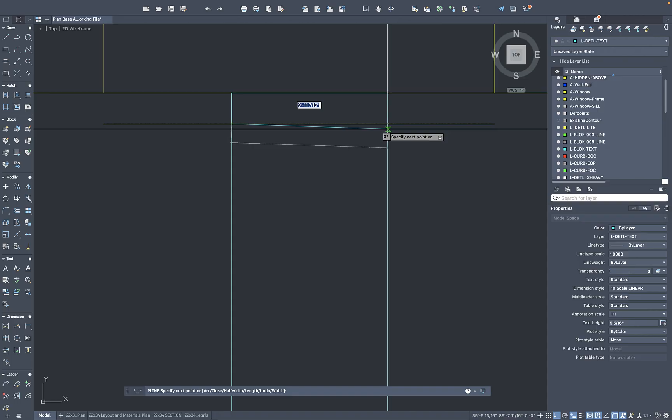So we're going to offset 2 feet off and create a polyline right here that is going to essentially be a large block of concrete, a turned down footing that's going to allow us to connect our boards, our boardwalk, directly into this ledger right here.

So I'll shorten up these 2 outside lines. To get started, we're going to offset these 2 lines 2 inches in, so just offsetting 2. That's going to be the width of our boards. They're going to be a 2 by something, we'll size those later. I'm also going to offset 2 inches this direction.

I want to offset this line because I made it a polyline, so it's going to offset on all sides. I'll come in quickly, trim that line, trim this, and delete the remaining piece here. For this ledger, we're going to trim out this as well, and we'll have our ledger board essentially sitting all the way across and connecting into this turned down footing here.

We need to start building some layers into this drawing. So for this, I'm going to create a few different layers in here. We'll first start with a new layer by clicking on our new layer icon here and just renaming this ledger.

Just for the sake of keeping things straight and making sure that I'm putting them on the right layer, I'm going to go down to my ledger. I'm going to change this to yellow, which means I click here, creating everything on our detail text layer, but I'm going to move this to the ledger layer right here. It should turn yellow. These right here are going to be our joists.

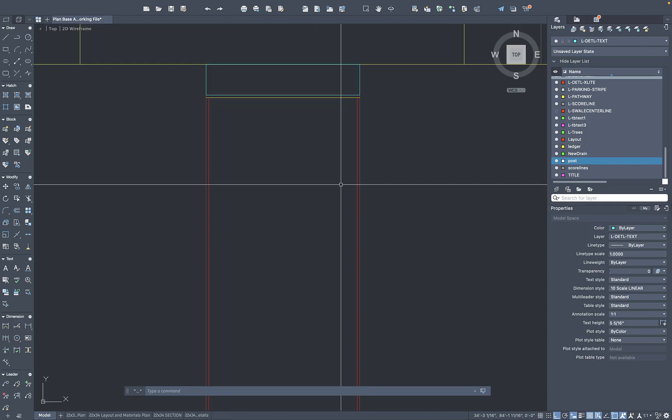Let's actually start creating that post. So we're going to start creating a few objects, then start aligning everything and putting it in here. I'm going to just kind of off to the side create this post. For this, I'm going to create a polyline, just click and go 4 inches over. That's going to be the size of my post, a 4 by 4 post. We'll just type 4 inches in each direction and then C space to close this off.

Let's go ahead and move this to our post layer. It should turn white. This post is actually going to sit on a concrete footing, and we're looking up at the top of this, so there's a few additional things that we're going to put in. If you look over here, we've got the X in our example, and that's going to mean that we're looking at the end grain of that post. So we're going to put that same X in here, we'll just type L space for a line and create a line there and a line here.

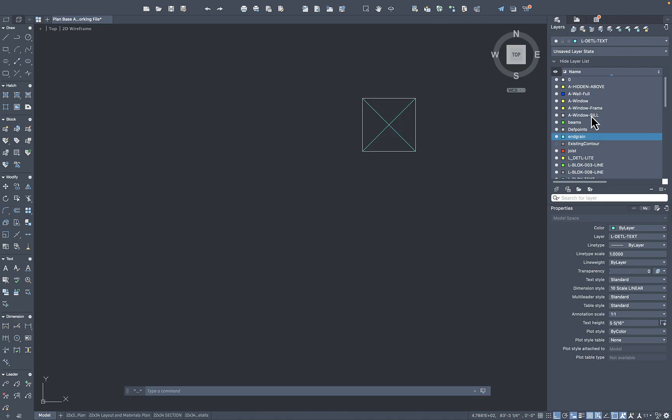We will again put everything on a layer, and we're going to call this end grain. We'll come up here to make this red, which allows us to click on this end grain and put it on that layer, making sure that it's red.

There's also going to be a concrete footing that this is sitting on. These examples have a smaller one, but for us it's going to be about a 24-inch deep one, and we're actually going to have it poking up out of the ground a little bit in our section. Those things come in 10, 12-inch diameter, so let's just do a 5-inch radius. We'll type 5 inch and hit enter. That's going to be our 10-inch diameter concrete footing that's going to be below this.

So let's also create a new layer for that. We'll call it concrete footing, and this is going to be one specific for the plan view. I'm going to make it yellow, and I also want to change the line type of this to be dashed.

So on that same concrete footing layer, we're going to come over and change the line type from default to one of these. We can do hidden, hidden 2. I'm going to do hidden 2 for now, and we'll just assess how it's going to look in model space. So we'll go to concrete footing.

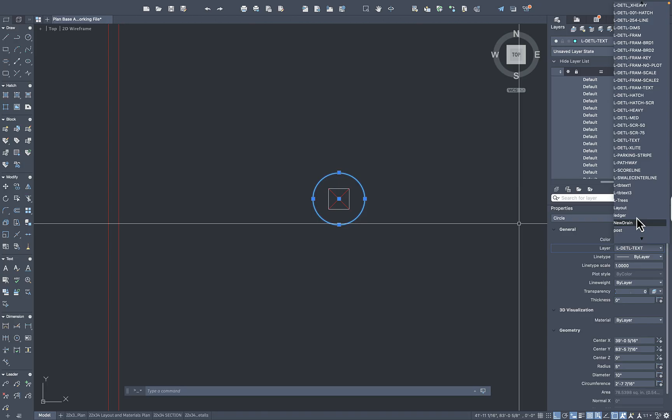Sure to turn this yellow. There's going to be a dash. Now, when we bring this into our paper space, that dash is actually going to show up, but for now this is going to be sufficient.

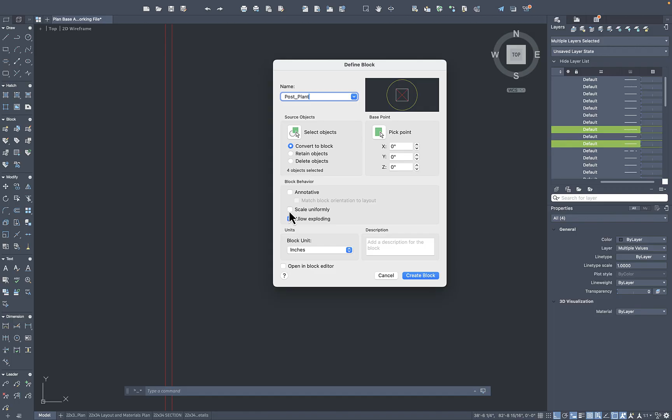So I'm going to highlight all of these pieces right here. We're actually going to type block. What this means, it's going to put it into a group. We'll call that group post underscore plan, and we will pick a base point right in the middle, and we will create that block.

So we can click on it. It's got our little pick point right here. We can move this thing around. We're ready to roll. All right, let's talk about the deck framing.

With this, we want to have a rhythm to our deck. For me, we could check the distance on it, and we either have to do the distance from this ledger all the way across, or we can do from the concrete sidewalk all the way across. Visually, we're going to see this on the approach from the sidewalk. We'll sort of see how that's looking.

I want to line it up with the center of the swale. So what we're going to do is create a line right here visually, and we're going to put our beam sets at about 8 feet in from each side, which will leave a 14-foot gap in the middle. I'm going to offset these 8 feet, but again, I'm not going from the ledger itself, just right here, so that's 8 feet.

We'll grab this line. It's not offsetting as one singular line, so I'm going to create a new one and offset this 8 feet. What this means is that we've got roughly an 8-foot joist right here, then a 14-foot joist right here, and then another 8-foot joist right here. This gives us a maximum opening for water to flow under this boardwalk right through here.

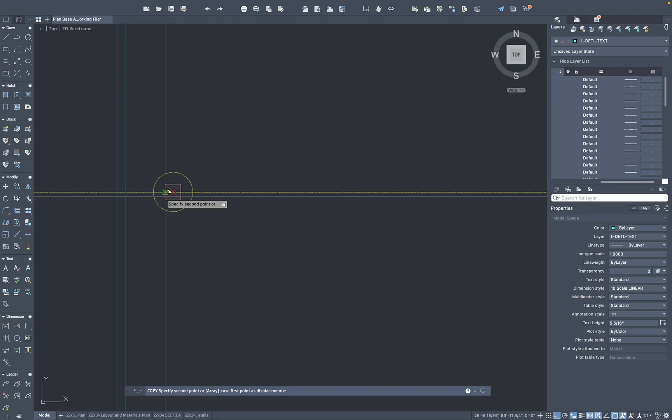Now that I've got this, I'm going to grab my post by the midpoint right here, and this is going to allow me to set it right here on our project. I'm then going to copy it from this endpoint, move it all the way to the other side, and set it on the outside.

Now, I haven't quite talked about my approach to the decking boards. Let's just hold steady right here for now. I have a distance of 10 feet from here to here. My beam span is not going to be 10 feet, it's going to be closer to about 6 feet based on the calculations I'm using for my lumber. So I can go up to 6 feet, no need to do that.

I'm going to actually just trim this out. Oh, too much trimming. Trim this line and this line. This should mean that this is sitting about dead center, which is going to allow me to copy this from the center point and snap it to the middle right there, and I can have this beam set or these posts all in a line with roughly a 5-foot spacing between them.

So let's do a distance, and it's going to be 4 feet 10 inches to the middle, 5 feet if we go all the way across.

So that is about a 4'10" on center spacing for my posts. Let's go in and build the beams.

To do that, I'm going to put a beam here, come all the way across, put a beam here, go up, type 2, all the way over. We can even type the numbers in, 10, and then C space for close. What's great about doing the polyline is I just have to click once, it's going to select all of that right there. We'll put this on our beam layer, and there we have it.

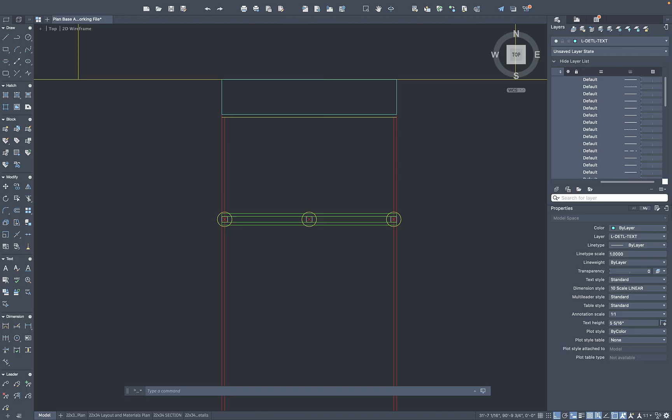Now these are just my outside joist. I'm actually going to erase those so I don't have to do as much trimming. I'm going to come back and really focus on this ledger right here. So we'll do another polyline so we can build this all as one piece, and then C space for close.

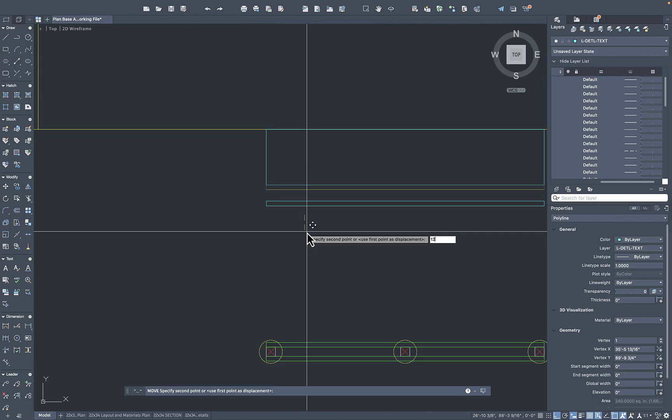I'm going to move it down just for the time being. Erase that, put this back on the ledger layer, and then move this back up to snap it to that ledger. I've got that created. I'm going to copy it down, just clicking on the outside here, coming all the way down and snapping it to this turn down footing here. And if you look in, you can see this is essentially where I'm snapping it to, and we'll use a wedge anchor to bolt this piece in.

All right, now it's time to put some joists in. I deleted the two outside joists because really I'm going to run them to the beams right here. So let's go ahead and start with that first one. I'm doing a polyline again, coming all the way down, snapping into the end point here.

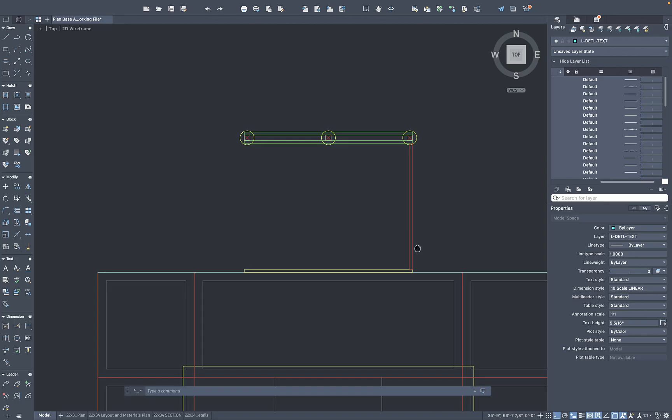We're going to come over 2 inches, go down here, and then hit C space for close. Let's go ahead and put that on our joist layer. Should turn red. And we will copy this one from this point all the way over, snap it to that end point right there.

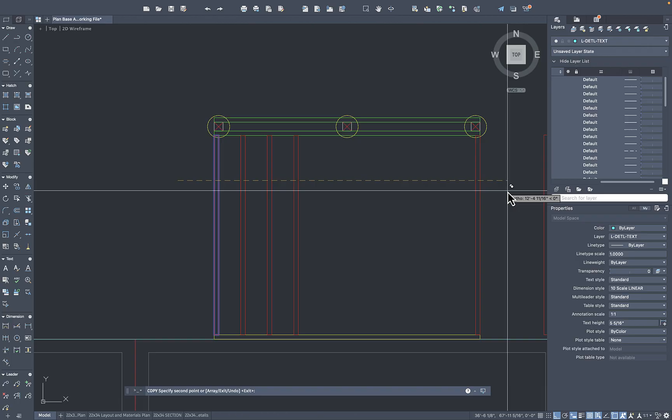Now, depending on our deck sizing, we might have 22 inch on center or 24 inch, we might have 16 inch, we might have 12 inch. Let's do 12 inch just to keep it nice and rhythmic as the on center. What you're going to notice is that when I copy this over this direction, I'm going to go all the way across. Now we can type it 12, 24, 36, 48, 60, 72, 84, 96, and we'll do one more that should get us close to it.

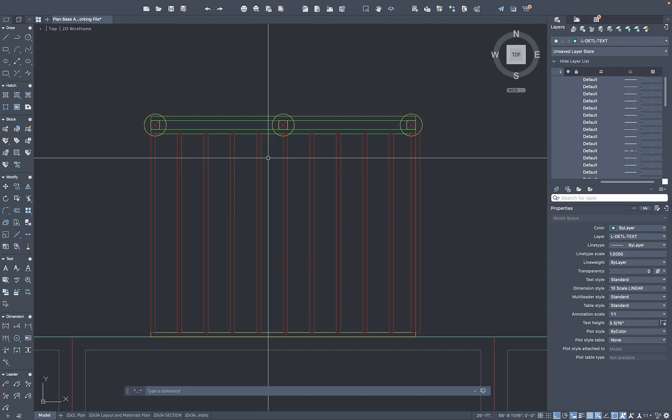So 96 plus 12 is going to be 108. And when we find that this last one, if we were to copy it over another 12 with that 120, it's actually going to be on the outside. So when we put these initial joists in, we've got to figure out, we can't put this one on the outside. If we don't have this, what we've got is all of the spacing here is set up to be rhythmic, 12 inches on center, so from outside to outside or center to center.

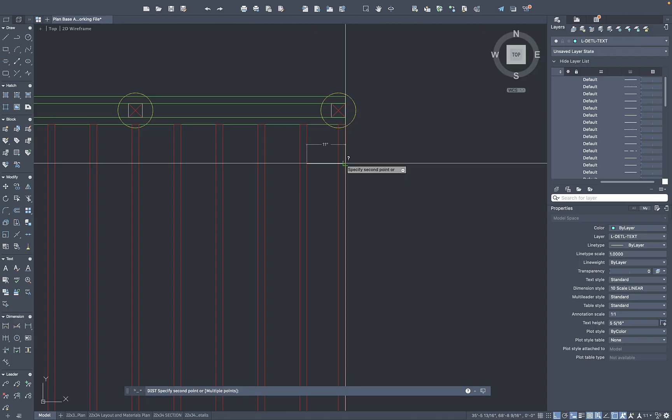But on this one, we are actually only going 10 inches. So what are we going to do about it? A couple options here. We can just make our deck 2 inches wider, that's one option. We can move this over 1 inch, and what it's going to do is it'll have an 11 inch on center spacing on the outside. We'll go all 12s in the middle, and then we will end with another 11 inch. This just keeps it rhythmic, gives us some sort of balance.

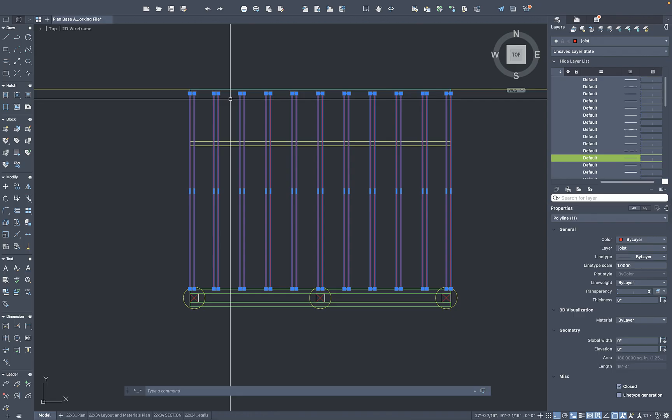We'll copy this up and use this same joist approach for these next sections. Now, if I've done this right, this one should line up. Actually, no, it's not, because we moved that ledger board in. So we'll have to move all of these down.

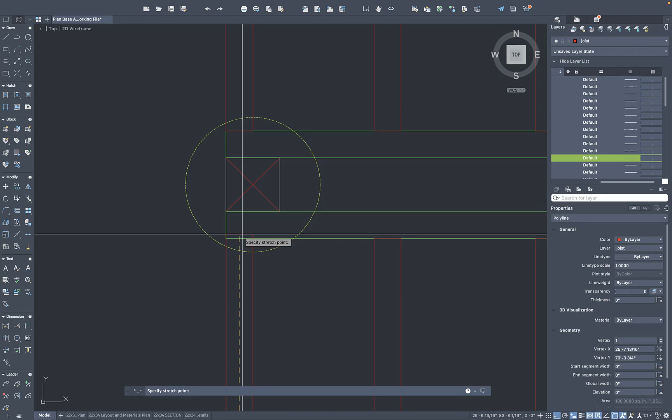All right, now just how we stretched all of these down to fit that ledger, we're taking all these in the center and we're kind of stretching them up. There's a lot of different ways to do it. I'm just grabbing this end piece, bringing it straight up and making sure that it's snapping perpendicular. This keeps all of these joists as one set of polylines, and you can see how that framing is actually working there.

There's a couple other things that we need to do, including putting in some blocking in between the beam sets. So I'm going to create that blocking as well, just grabbing this, using the existing board to snap to, pulling that down, matching properties where I click on the joist and then click here. And then what I'll do is I'll just copy this over from this endpoint to this endpoint and so on. In the case of this one right here, it's going to land right on the post, so no need for blocking there. We'll just kind of continue this down.

I can also grab all of these, copy them by picking them up on the center point of that post and dropping them off at the center point of that post as well. The same thing is true for the blocking that might go across the decking this direction, especially in this section

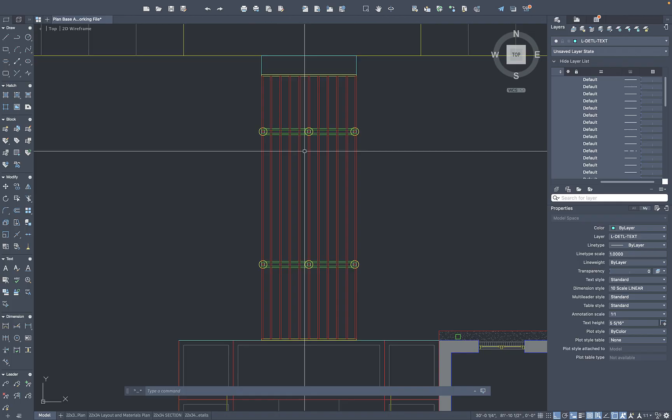where the boards are pretty long and we might need some blocking about the midway point. Now this gets most of the framing outlined for our decking project. If we go back and look at this example right here, we're showing beams, posts, and joists, and we've obviously talked about the blocking that exists in between here. Let's talk about these joist hangers right here.

This detail is calling out the joist hangers somewhere around here. It says Simpson face mount hangers, model LUS 210, which is going to be their joist hanger for a 2x10, or approved equivalent, install per manufacturer's recommendations. A great note, but we want to talk about how to visually show these pieces right here.

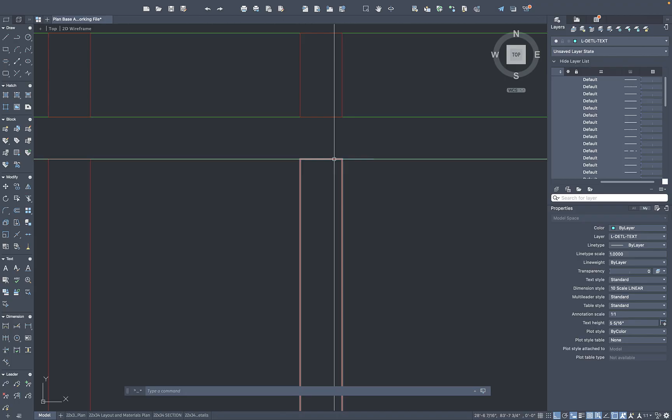As we go back to our plan, we're going to put joist hangers in at this spot here. I'm going to create a joist hanger that goes out, let's say this is 1.5 inches. That's probably a bit much, but it is visual, so we might say 1.5, and that's our joist hanger going out this direction. We'll also create another line here. We're going to come straight down. We'll do the same, 1.5.

And we'll grab these pieces and we want to put them on a layer called joist hanger. So we'll create a new one. We'll say joist hanger, and we want to also change that color to something unique. Let's make them white. And I'm going to grab this and move it to the joist hanger layer.

We'll see this bulk up as white, and what I'm going to do is type MI, which is going to be my mirror tool. If I click the midpoint of this joist and just pull down, it's going to mirror that over. Do I want to erase the source objects? No. And so I'm going to have my joist hanger right here.

I'm going to grab this and we will just start to copy these around. Make sure that you put them on a layer before you start copying them around. It's going to save you a lot of trouble. We'll do one section first, right here.

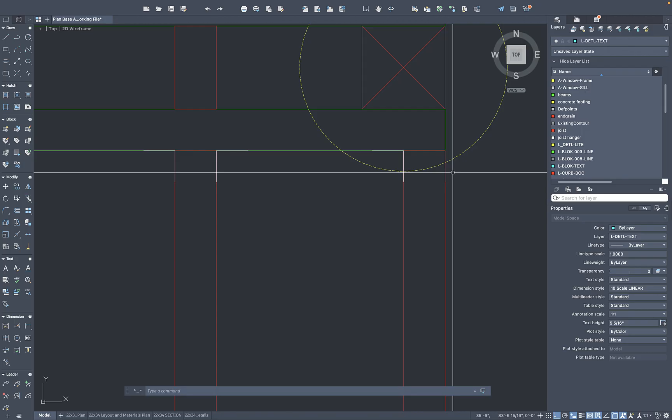And of course, as we get to the end, we might flip to an inverted joist hanger. We're going to delete that line off the end. We'll come back and copy this joist hanger as well.

Similar to mirroring the joist hanger from one side to the other, I'm going to pick up and grab all of these pieces here. What's wonderful about all these things being polyline is I only selected the joist hangers when I did that. I'm then going to pick the midpoint of this post right here and just pull directly sideways. And you're going to see that we have just mirrored all of those joist hangers.

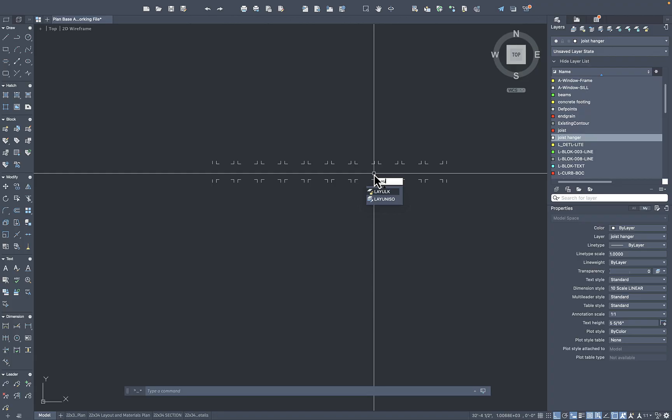Now, if I wanted to select all of these and copy them around, what I can do is engage the lay ISO command. This is going to allow me to isolate all of just the joist hangers by themselves. To undo that, we type lay uniso. When you type it, it could be that your settings default to where when you open it up and type in lay ISO, it lets you click the objects.

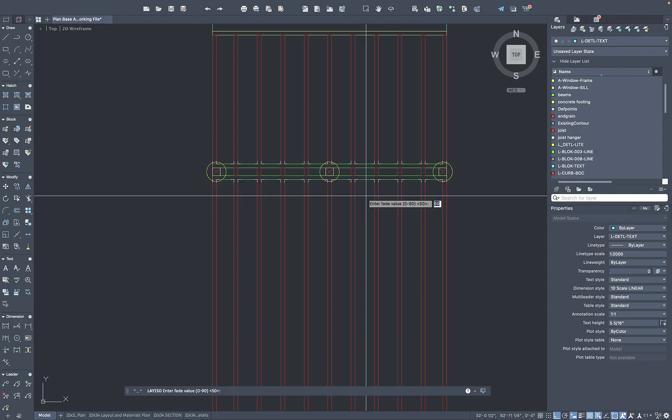But I'm going to type the letter S and go to the settings. And we can either choose off, which is what I have it set to, which turns every other layer off, or lock and fade. Let's change it to that. And so we'll keep the fade at 50%. And now when I click my joist hangers, it locks all the other layers.

I can select them, but I can't really move them, but they're still visible. That's going to be really helpful for grabbing all of these and copying up our joist hangers. And so I can still snap to all the other line work right here.

I can then grab all of this together, copy it down. We'll say from the center of this post to the center of that post. And then again, the same thing where I grab just this top row right here, copy it from the endpoint here to the ledger right there.

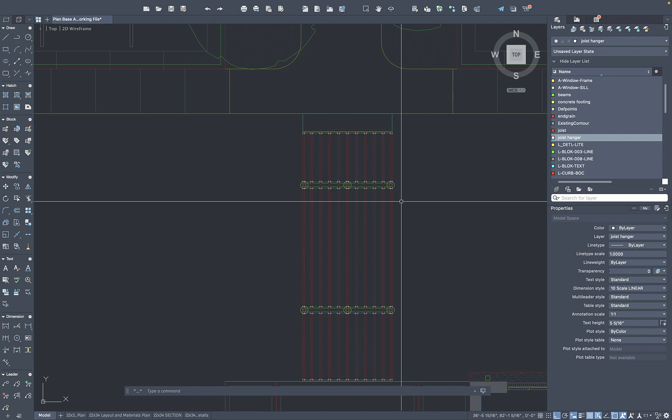And we've copied all our joist hangers around. We can say layer un-ISO to bring back all the layers, and we've got those in there. Let's go check out our plan to see how it's working.

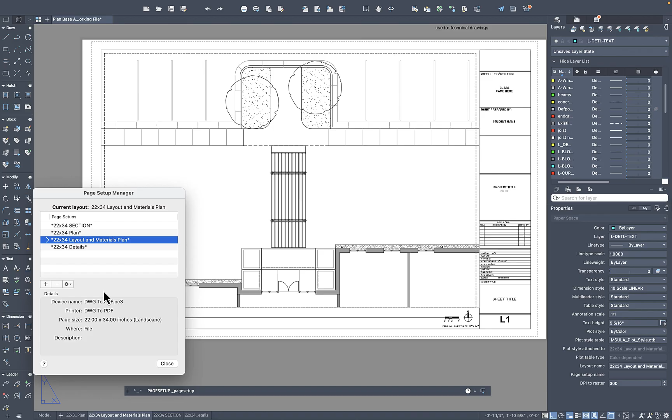I've got my layout and materials plan here, and if I zoom in, I can already see that dash line showing up. I'm going to go to our Page Setup Manager, so we'll say File, Page Setup Manager. We'll go to Edit, and double check that we have the MSULA plot styles in here.

This is going to be great because it's going to allow us to go to Plot, and then what we can do is go to Preview. It's going to open up a preview of what this is looking like.

And based on all of the colors, you can see that white for the joist hanger is super heavy here. If I can pan around and find it there, you can see the line weights and layers are working, but it's not where we want it to be just yet.

So we'll find a time to really fine tune and tweak all of these layers. Because they're on layers, I can go through and just adjust only the colors, and it's going to change it throughout the entire drawing. So let's exit out of that, cancel, and go back to our model space.

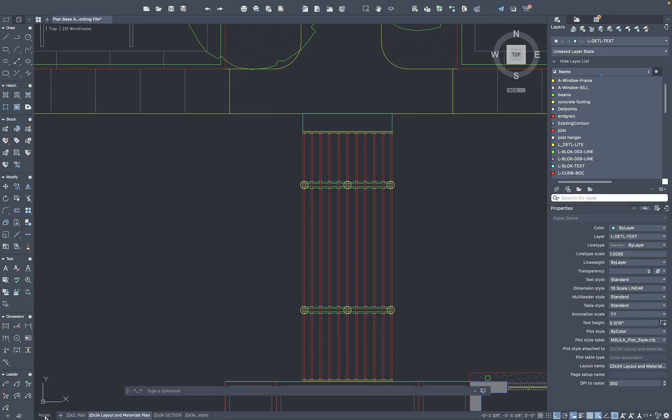Let's put in the blocking and just kind of go ahead and wrap this drawing up. For the blocking, I'm going to just start at the midpoint and go right across here.

Offset, let's go 2 inches. I'm going to give a little bit of spacing just to show how that blocking alternates. I might keep it just like this.

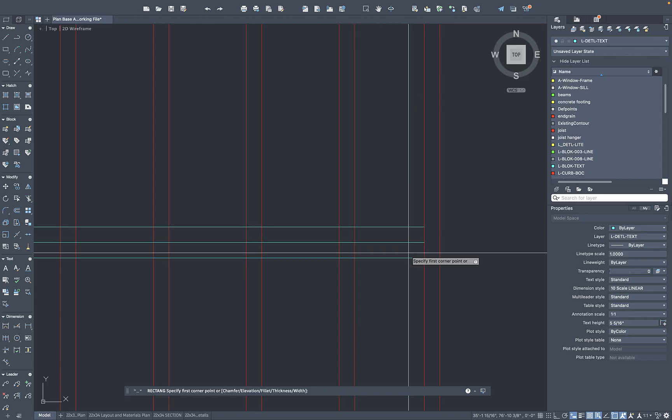I'm going to type REC for rectangle, and I'm going to set one block right here. Hit spacebar again to repeat rectangle, and I'm just creating these alternating blocking rectangles using those grid lines that we already have on here.

So again, REC for rectangle, and then I'm just clicking and creating all the rectangles. These essentially are polylines, which is what we were doing earlier.

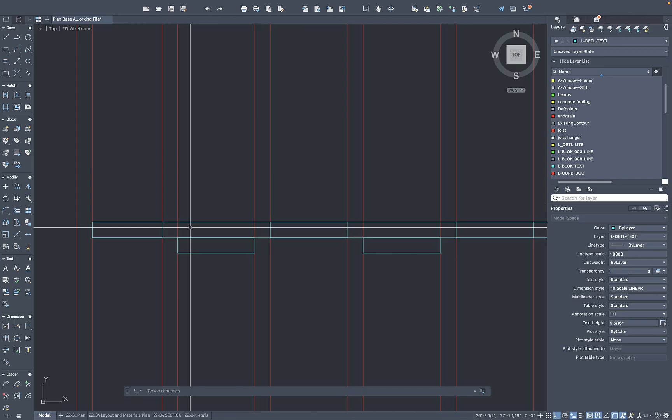Now if I click on this guideline that I was using, and this guideline, and this middle one, you can see that I've got the blocking alternating right there.

Let's go ahead and put it on a layer as well. So we'll create a new one, we'll call it blocking. We will change the color of the blocking to yellow, and then select all this and put it on that blocking layer.

On ours, we're kind of caught in between, probably too far out to really see a lot of that stuff. But if you were to do a zoom in of your deck detailing, this would be an appropriate time to show the bolts.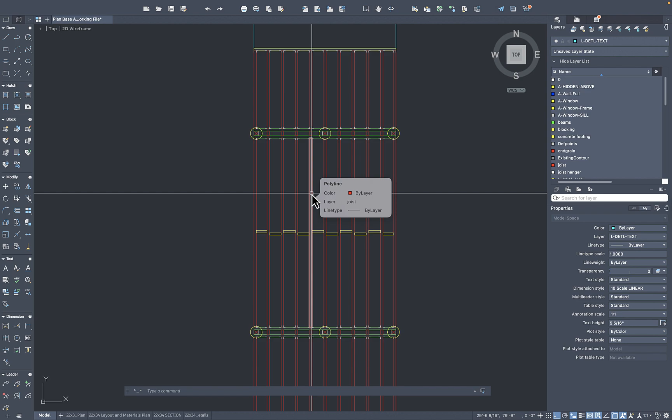Let's talk about the decking boards and actually doing some decking boards across here and how that might work. I'm going to keep it super simple. I'm going to create a decking board that is going to be this length right here.

What we're going to use is just a basic 5/4 decking board. That's 5/4 inch, so 1 1/4 inch thickness. That's the nominal thickness, and then a 6-inch nominal width there.

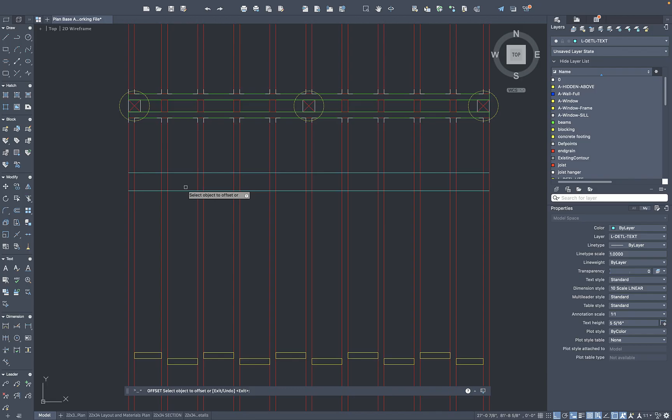So what we're going to do is create that line. We're just going to offset 6 inches down. We'll do a 1/4 inch gap between them, so offset 0.25, and that creates this new line right here that is the gap between these boards.

I will then offset another 6 inches for this board. This rhythm kind of gets us going with our decking boards.

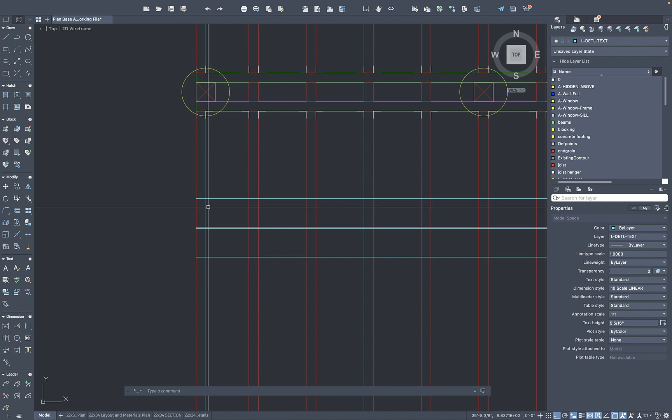What I'll do is similarly create these as one large rectangle. So in this case, I'm going to come back and say PL for polyline, and better yet, we'll use the rectangle approach, REC. Click, and then click all the way down here. We'll do it again, REC, and create another rectangle.

What's important is I've got those lines underneath, so I'm going to grab these 2 rectangles, move them down, and erase those guidelines that I was using. Now I can copy these up.

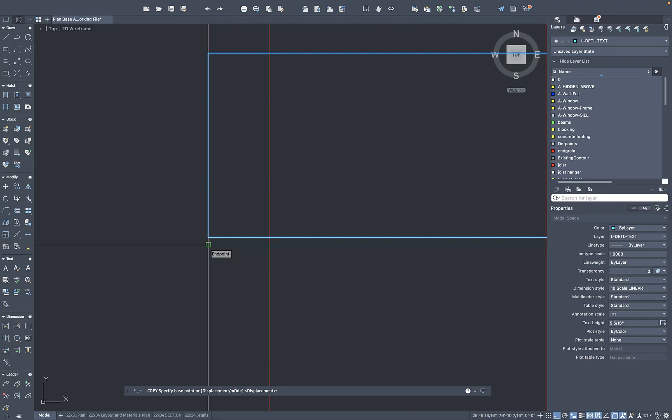I'm going to select the top one. This is a helpful tip: select the top decking board, say CO for copy, but instead of picking it up anywhere or even on the board itself, I'll pick it up at this 1/4 inch gap right here, so that when I pan up, I can drop it off on this decking board and it keeps that 1/4 inch gap.

And then we can do that for all of these and create a stretch of decking boards. What I like about this is that they're indicating there's sort of a swoop in the decking, so it's like, hey, this drawing is mostly about the framing underneath, but we want to have a chance to talk about the decking boards on top.

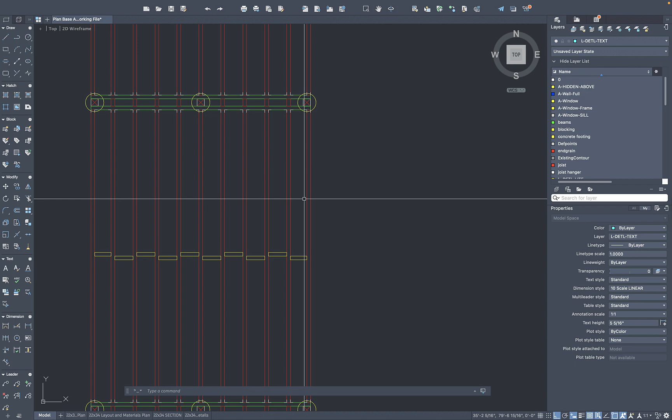This is where we've got a decision to make. We could leave the decking boards off entirely and just make this about the framing plan. We could have a separate plan off to the side that just shows the decking boards, with the hardware in there, as a standalone plan. Or we could try to do what this drawing is doing and be a little fancier, trying to showcase all of it in the same drawing.

For the sake of just testing something out, we're going to take this approach. I'm going to cut a little swoop in here — we'll say A for an arc — and let's see if we can create a cool looking arc through this. All right, I think this will work.

Now I haven't put any of these on a layer. We're going to call them decking boards, so let's create a new layer and say decking boards. I'm going to change the color just so I know I've put them all on a layer — we'll put it on a green layer. Grab all these lines, including this little break line I've created, and put it on decking boards.

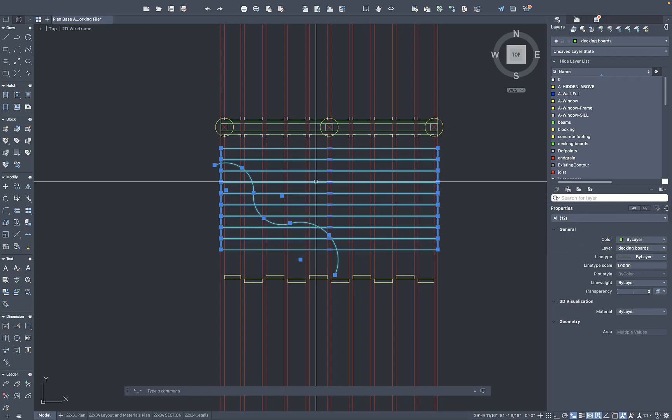Now I want to trim out all these decking boards, but I want all the other stuff to go away so that as I'm trimming, it's not using the joist as a trim cut line. So we'll say LAYISO, hit S for settings. I'm going to go back to off, and in paper space we'll do the viewport freeze — we'll save that for later.

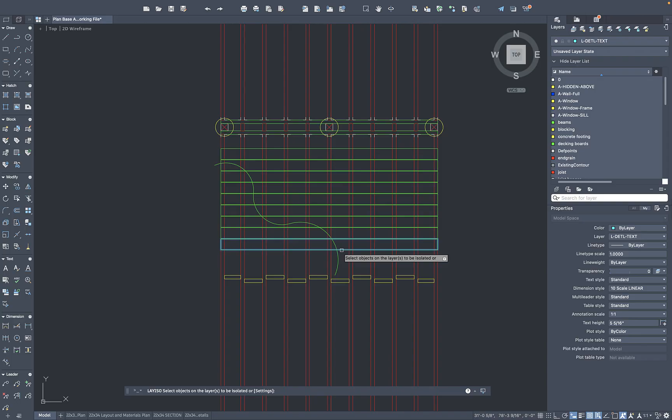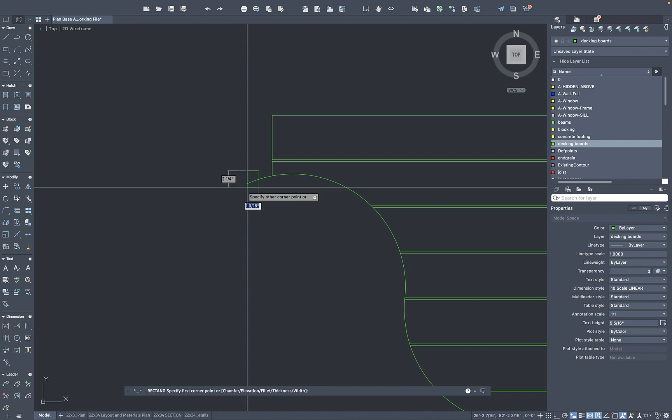This allows me to click here. Now as I trim, I can click these lines and trim them all based on that cut line. Erase all these stragglers hanging out here, make this line a little shorter, come up here and make that a little shorter. We'll say LAYUNISO to bring it back in place, and we can see how that's looking. I want this to go a little further, so we'll give it a line to extend to and erase that back out.

The next step is to put in some screws. We're going to be really hyper specific on these. First, I want to create some guidelines right here that will help us align these screws up. I'll bring my snaps back, snap to the midpoint, and pull straight down so I have something to snap into here.

We're going to put 2 screws in here, so we'll place them 1/3 and 1/3 of the way in. This is a 6-inch board, so I'll just offset 2. This will let me pull some lines off there and there — maybe that's the way to do it. I don't know, 2 screws — let's see how it looks.

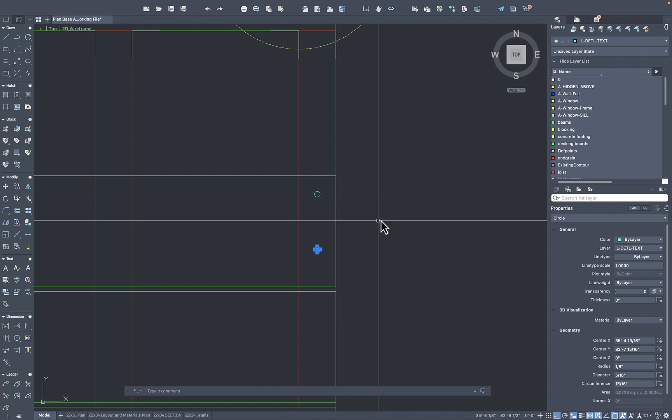Right here we'll say something relatively small, and we'll grab this circle and copy it from the midpoint to the midpoint right here. If I delete these out — I already know I don't like it, because I'm typically putting these screws a little closer. So let's move it 1 inch up, move this one 1 inch down. Feel better about that, let's roll with it.

We can get too cute with it if we're not careful. So let's create a new layer and call it screws — we've got our screws layer. We're going to change this to red — better yet, let's change it to white. And I'm going to put these 2 things on that layer.

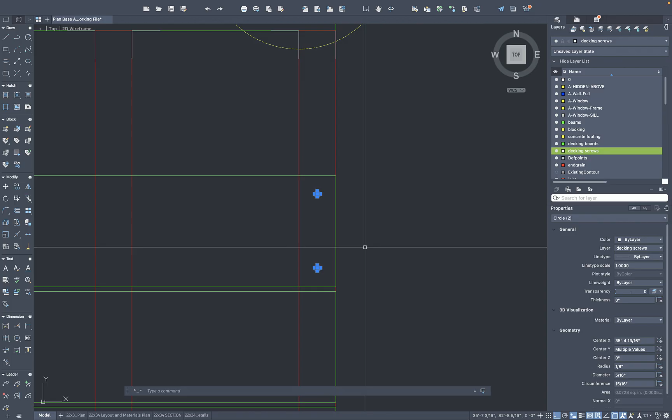All right, now that we've got 2 screws in the right location, it's going to be a lot of copying around. I'm copying from the center of this joist to the center of this one to the center of this one, and we're just going to keep marching down the line. If you get tired of it, you can grab this whole bank of them, copy from the center of this joist, paste it there, and march on down, pasting a few more.

All these excess ones are easy to grab, we can just delete those out. Next thing we'll do is grab all of these again.

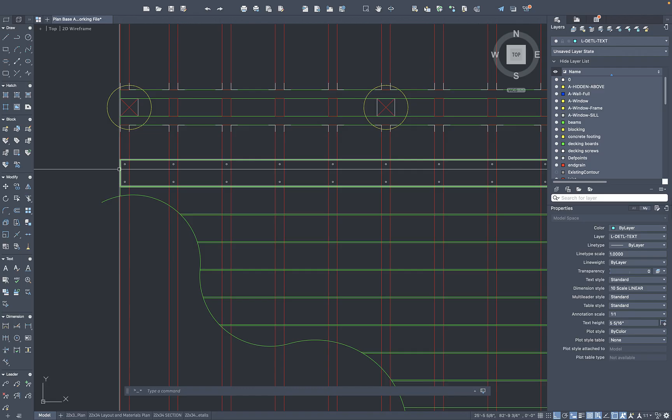Here's a helpful thing to remember. I copied all these over, but because I had this spacing right here, these are all off. So we'll grab these again, only copy the ones that are in this particular section, paste those there, and come back and delete these. Things like that happen, but it's the beauty of CAD—we can move quickly and fix that error.

I'm going to copy these down from the decking boards and just kind of keep placing them at each of these endpoints.

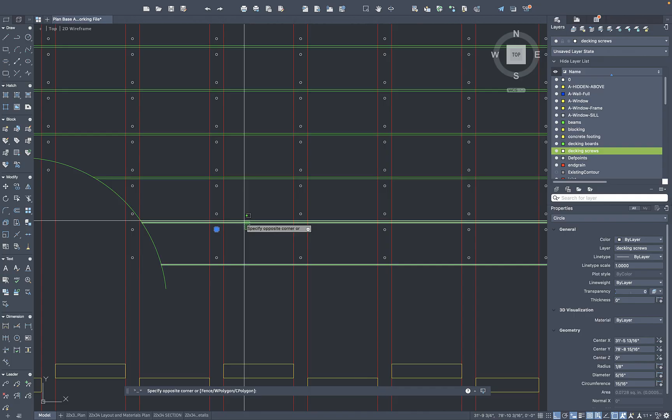All right, so we've got these in here. What I'm going to do is go back to lay ISO. I'm going to select these things—in this case both the decking boards and the screws—and do lay ISO. It's going to allow me to visualize all of the screws that fall out of our project or our decking boards right here.

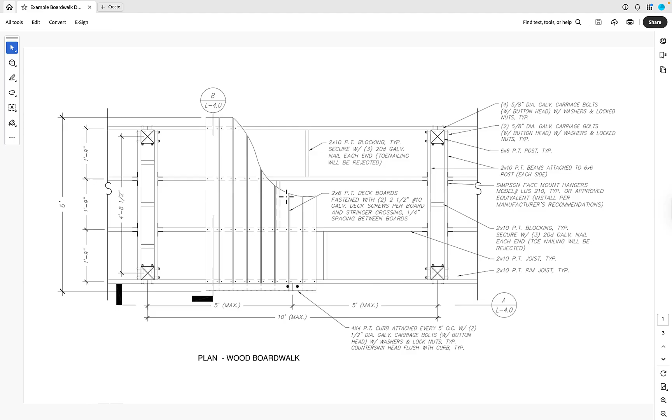We'll just delete all of those, and we can say lay un ISO. Now we've got all our decking boards in. This is great, but what do you notice? The lines for the joist become dash lines underneath, right? That hidden line type is super light, so we don't have all that stuff competing. Takes a little effort to do, but we can do it.

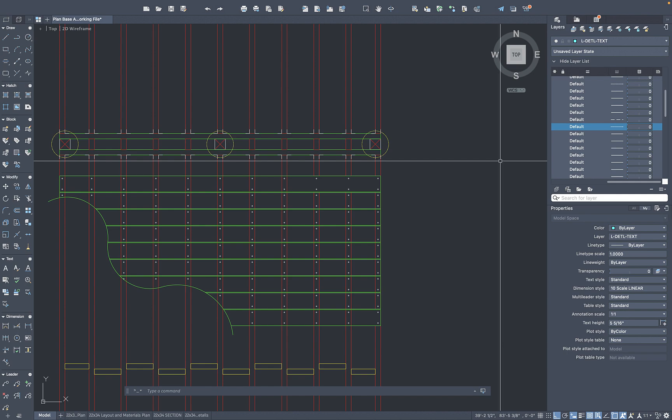What this allows us to do is create a new layer. We'll call it the hidden framing layer, and go to that hidden framing, put it all on. We're going to change this to one of our screening layers, probably something like this, and change the line type from here to hidden. We'll put this line and this line on that hidden framing line. It's going to give us a lighter line, and once we've made that change, we can just expand that line back up, and expand all these lines, frankly.

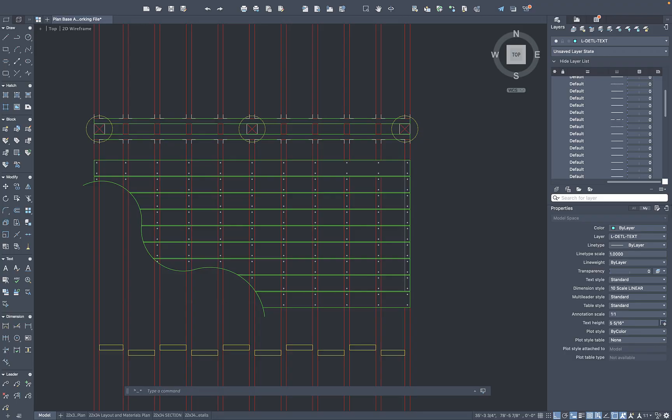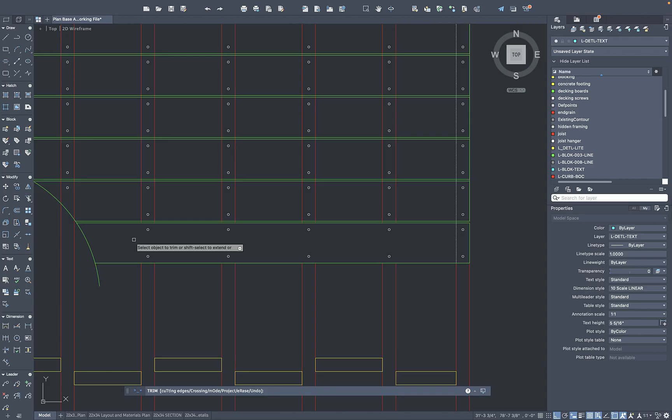I am going to just demonstrate it for this one. We'll go back to our framing plan, and you can see we've got that light dashed line underneath. I'm going to finish this out for all these other pieces of joist that are underneath by trimming the joist there so that I can extend these back down, and then of course we'll trim all of these as well.

All right, so that gives us that look with the lighter joists underneath. Last step is figuring out some labels.

As we get ready to do this, there's a couple ways to approach it. We can label it all on this larger layout and materials plan. So I've come to this view, I've got it framed up, and this is my overall site plan. It's going to show all of the components, including the existing contours, that swale center line that's in here, so we'll have all those pieces together.

What I want to do is actually turn those layers off again. So we'll come back to the plan, and what we're going to do is turn them off to get them out of that view, and let's see what it would look like if we were to do this.

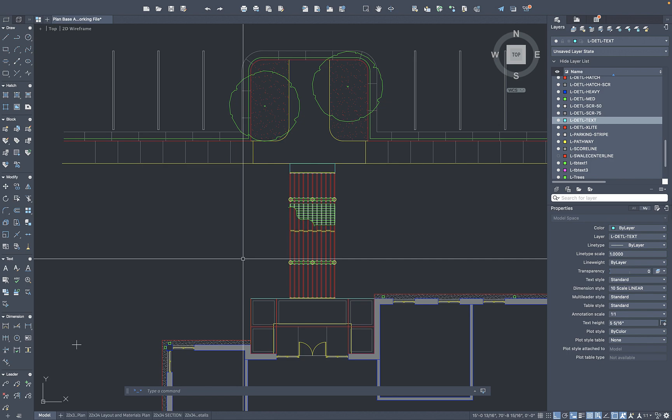Click on the layout materials plan—I'm double clicking here, we are at 1/4 inch equals a foot. What I'm going to do is double click outside of this, come back to my tab here, using the detail template, we are at 1/4 inch equals a foot. I'm going to come into our dim style, find 1/4 inch right here, and say set current. If you're on a PC, that's going to be clicking set current in the top right. That's an important step—it's going to confirm that that is where we're at.

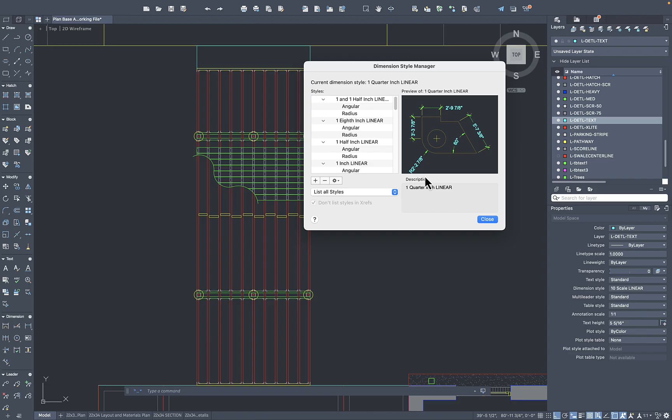We can type in leader, and this is where we can point to something, come out to the side, and we're going to type in this, which is a 4x4 pressure treated southern yellow pine post.

We'll say something about the detail, and what we can do is include the actual detail number and call out in it. We'll do that in just a second. What this does is give us that call out when we go to our layout and materials plan sheet. You can see that text will come up at an appropriate size.

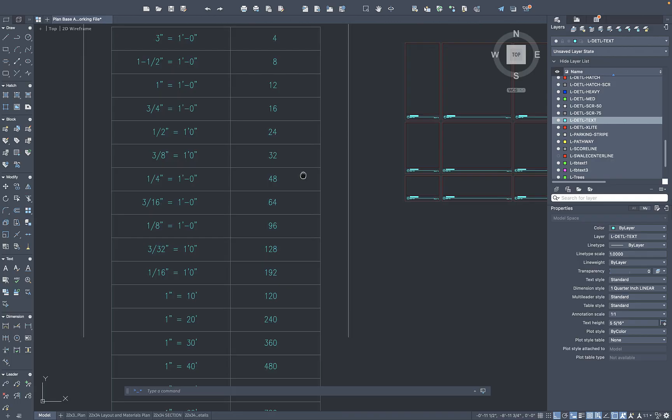Let's go ahead and put the call out on there as well, so we know we're doing 1/4 inch. If I go to my detail template, 1/4 inch equals a foot is a scale factor of 48. So we'll grab this stuff right here, copy it up. We want to set it off to the side of the project. SC for scale, click a base point. I'm clicking the bottom left so that when we scale it up, it'll fly out that direction. We can use this right here to be our detail call out.

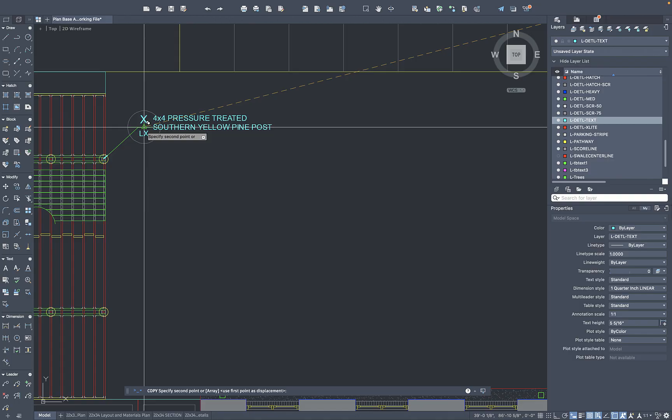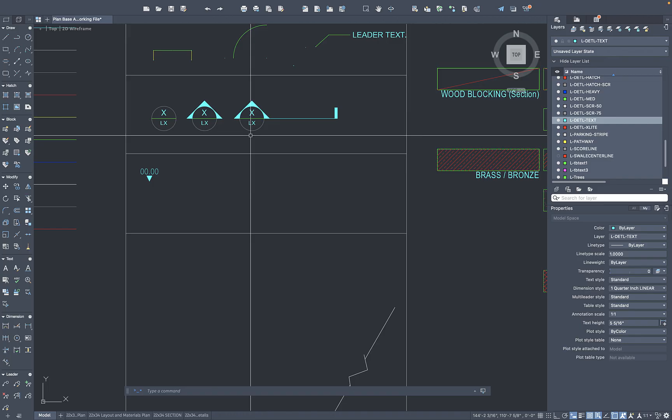Now for me, the detail template's fine, and this call out size is fine. I'm a big fan of taking all of these and making them somewhere in the range of 50% the size, or 75%. Let's not go crazy, we're gonna say 0.75 is the scale factor. It's gonna shrink all of these down so that now I can grab this. I just feel better about the size of it.

I'm gonna drop it off to the side. I'm going to grab this detail and move it further over so that I can then pull this out and pull this over. Again, pointing to that, but the reason I'm pulling it that way is so that I can put this detail call out on here. You can slide that over, move this over, just kind of setting this one perfectly so that I feel great about it, and I can copy everything else down.

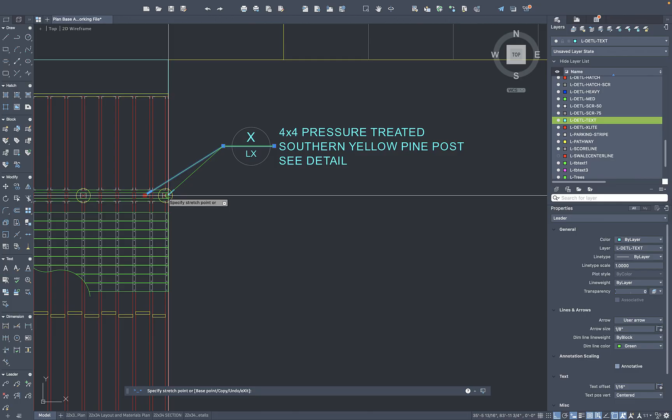For all future notes, I'm going to line them up with the same kick point right here. I'm going to end my detail right here. That is a way to kind of do this. It's going to size it up perfectly for our layout materials plan. You'll see all this in there.

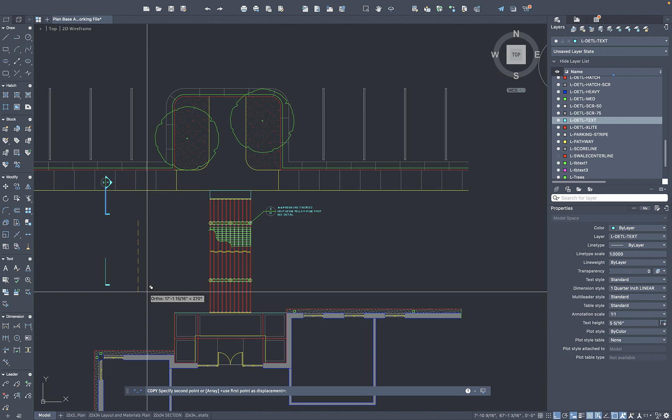I could even grab my section cut line. I know I'm going to do a bioswale section, so I can just bring this over here, probably put it right there. Let's grab it, this too. We'll rotate from the center point of that circle, turn on ortho this direction, and I'm going to just copy this piece down, and we'll put that section cut ending right there.

So with my section cut, I can actually make it all one solid line for my bioswale, or I can do it as a break in between. Just depends on how intense your project is. But those are two different approaches for doing that section cut line right here.

I'm also going to have a section cut that's going straight through the boardwalk, so we'll have another one there. That's probably the instance where you wouldn't show all of the pieces of that line. Let's just sort of drag this over, and we'll do that, surely. Something like that will work. I'm going to undo that.

We'll figure it out later. All right, this is one approach. Now I'm actually going to show a different approach altogether. Let's go into a rectangle that is going to call out the framing plan. So I'm going to create this rectangle right here. We're going to take a fillet radius.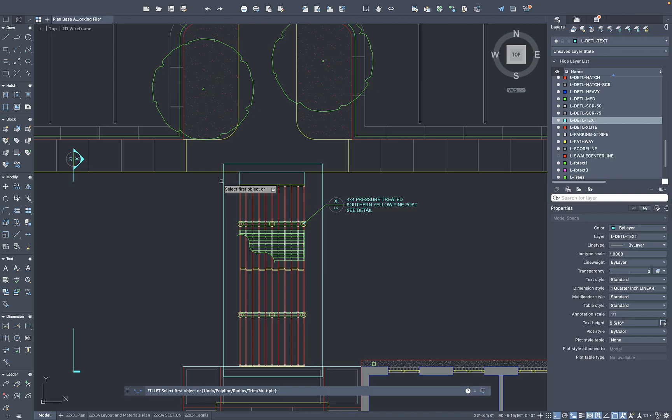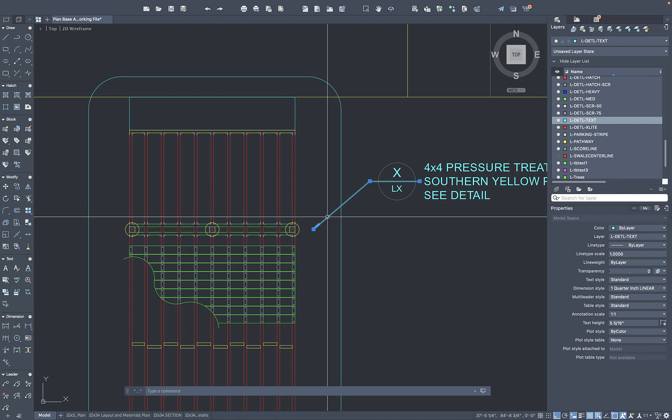24 inch, we'll put a little circle around this. This is going to be an example of how you might call out a detail within a larger layout materials plan. So in this case, what I'm going to do is pull this out, we'll trim this. Can't trim it, so I'll explode it. Erase, trim, and we're just going to point to this.

Maybe go just straight across like that and point to it. This is going to be a detail call out. I don't really have a dashed line type for that, so I'm going to make this my detail call out. We'll come up here, we're going to slide over, make that a dashed line as well. We'll do a larger dash.

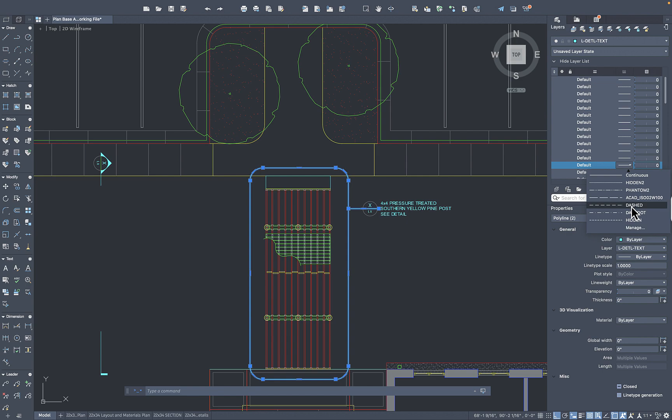And yeah, detail call out. So it's going to dash this line, and we're pointing to that dash line. I might make this one solid again, just pointing to it. This is going to say, hey, we are calling out this detail, and we'll just give it a name.

We'll say framing plan and click save. This is going to call out that particular framing plan.

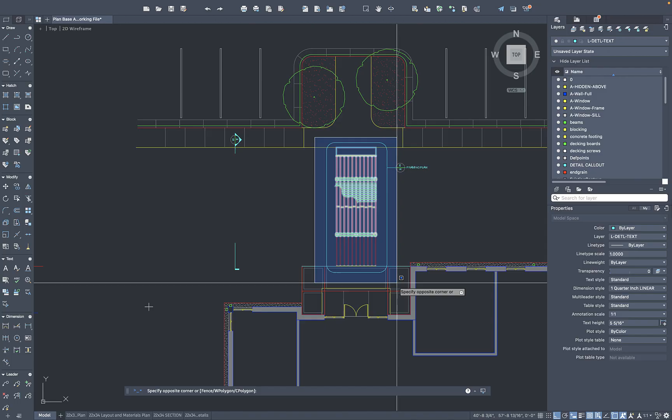I'm going to come to my details page right here. I'm going to erase two of these blocks and create a detail for this framing plan, but move it off to the side to make it a standalone piece. We'll grab all this, copy, pull this up this direction, and put it right here.

What I'm doing, maybe the bigger question, why am I even doing this to begin with—it just allows me to do a larger scale. I can zoom in on this. Remember, our layout materials plan was quarter scale, so what if we were to go into half scale? Now I can see quite a bit more of this.

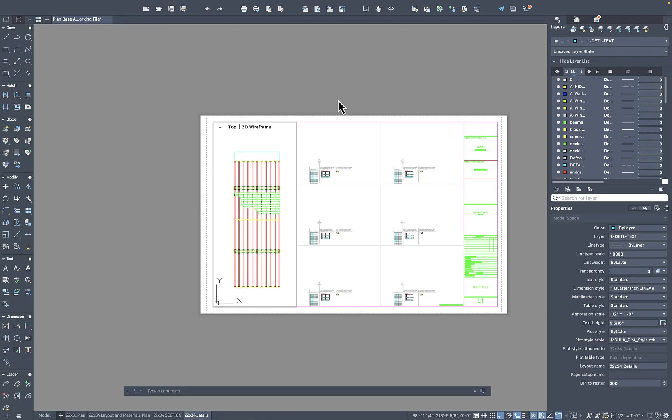You might even say, what if we were to erase all of these blocks out and just do one larger framing plan right here that allows us to call out all the pieces, and put all the labels off to the side? Let's just give it a shot, see what happens.

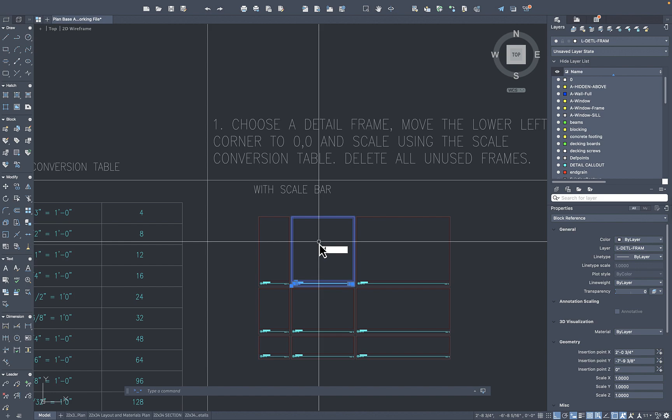For this, I did 1/2 inch equals a foot. This is my detail frame for 2 wide, 3 tall. So I'm going to copy this over—1/2 inch equals a foot is a scale factor of 24. Put this here. Scale, click a base point, type 24. Now I've got this frame.

I can kind of put that frame right there and use this as my place to call all this stuff out. We said we'll do a dim style, set it to 1/2 inch, set current, and we can begin to put in a leader, point to our ledger here, here.

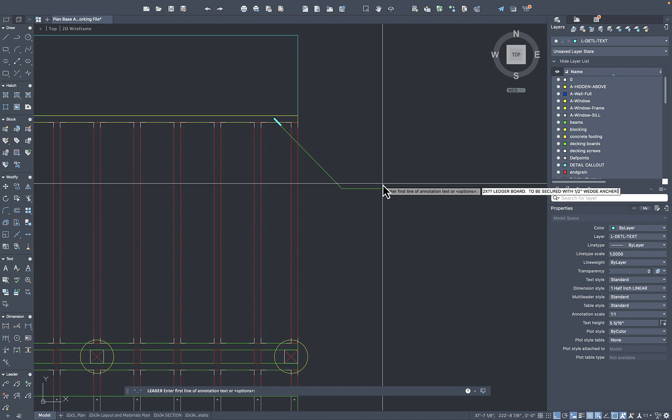2 by question mark ledger board to be secured with 1/2 inch wedge anchor and nut/washer at 12-inch O.C. TYP. So something like that, right?

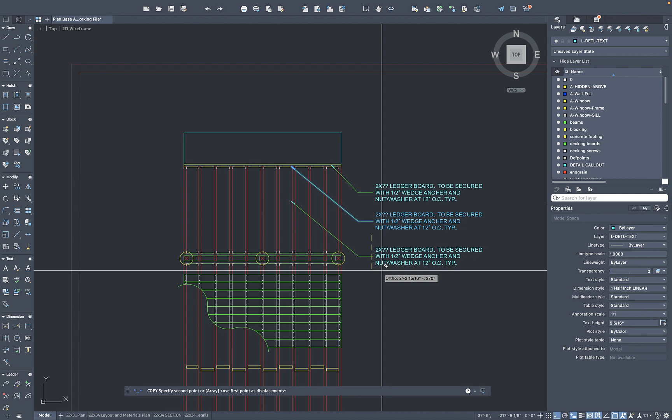We're going to think through those labels. We'll put this off to the side, and then we are just labeling this thing up. We've got a lot to talk about—we're going to talk about the joist hangers, the joist, and all that sort of stuff. We just spray all these things off to the side and down below.

We've got a lot of room on this side, so we can stretch this out. There's a few different approaches for how you might plan to attack this. We also need to put some dimensions, some typical dimensions. We've got our same dim style on, so we can do this like an overall dimension right here.

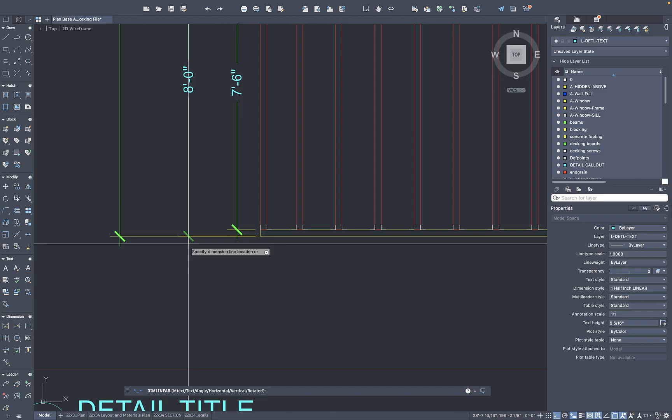We can also go from just the joist itself here to here. We can do an on-center spacing of this to the concrete—shows that 8 feet, center to center. Remember, as you're doing these, to snap to the previous dimensions, here and here, so we can snap right there. You see all these numbers lining up.

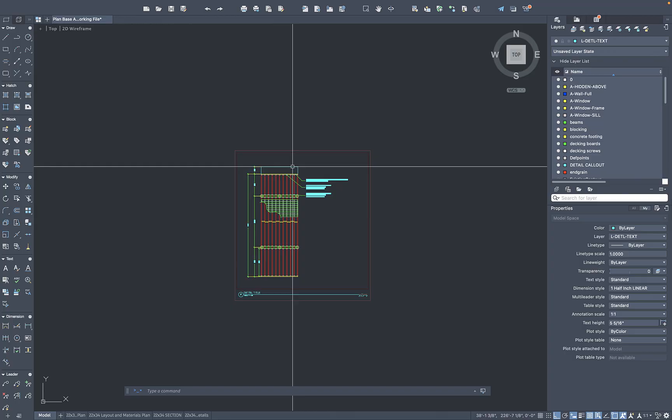So this is the second way. This is going to say, hey, we are creating a standalone framing plan that's going to show all the information. I honestly like this approach better—this would probably be the thing that I would do, because as you notice, we've got a lot of things to call out in here. It is going to get really muddy in here, but to each his own.

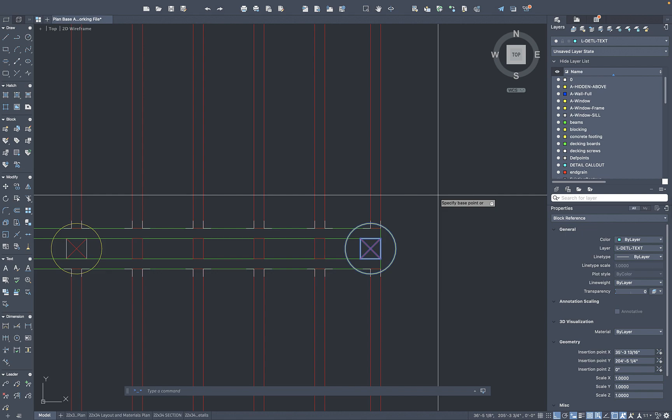All right, let's talk about ways to elevate this. Move these posts in, right? We can move this in 11 inches, set this right here. We can move this blocking out 11 inches, put that right on the edge. Gives us a chance to kind of suck in the posts, hide them.

We could grab the beams as they are cantilevered off—let's flip this back. I could even grab the beams in this case and pull these out another 16 inches. This gives me a chance to do a decorative piece on it, but also potentially attach a railing or something like that. So we've got different options, all sorts of things you can do as you're wrapping this up.

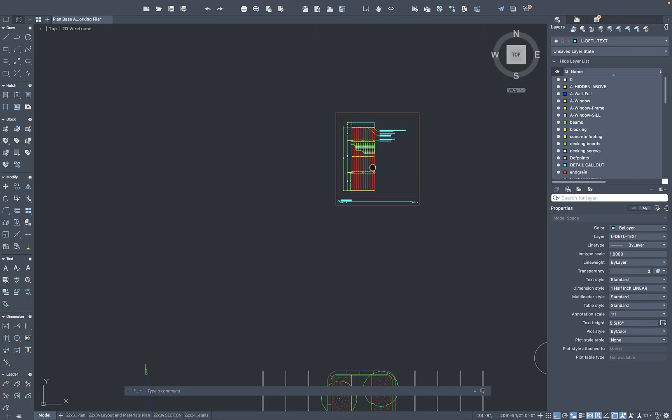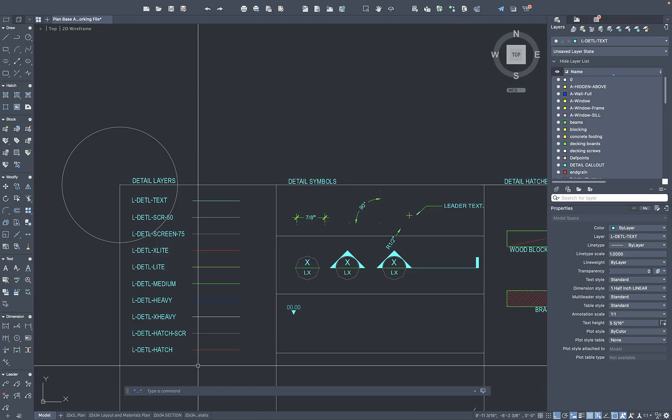This gives us the basics for doing our framing plan, putting in the detail callouts, the labels, the dimensions, all that good stuff, and getting a good healthy start on this. We've got all the layers to be able to adjust line weights—feel great about that. We'll use this guide down here to help us, or really any of these. We can reference our layers and the line weights here just to get all these things right. White is going to be terrible, but yeah, this is going to be our start to kind of getting this boardwalk in place.

Good luck with it. Look forward to seeing what everybody comes up with on this project.